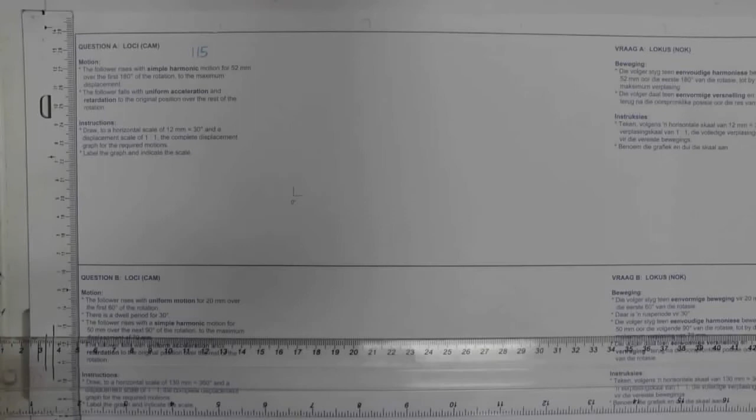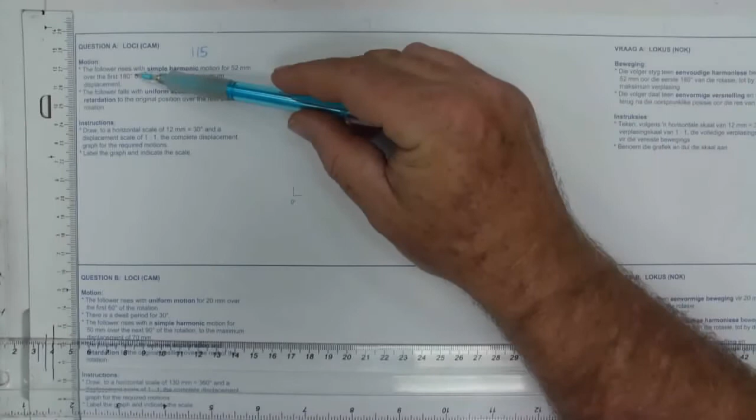Hello grade 11s. Today I'm looking at page 115 from my workbook, where they're asking you to just draw the displacement graph. And what they're saying here: the follower rises with simple harmonic motion for 52 millimeters for the first 180 degrees. Then it falls with uniform acceleration and retardation for the rest of the rotation. So the scale here is 12 mm to 30 degrees, and the vertical scale is 1:1.

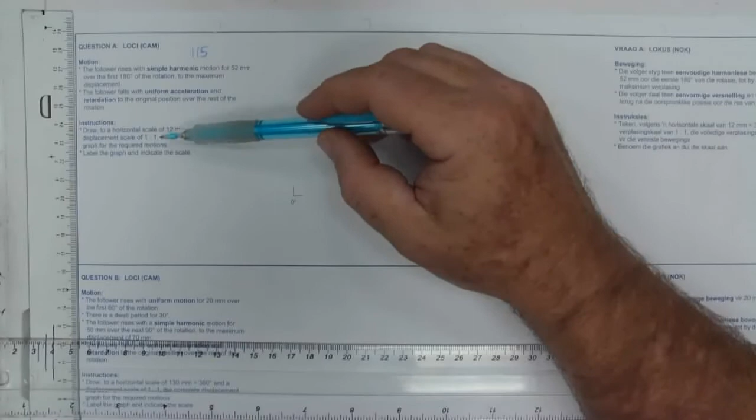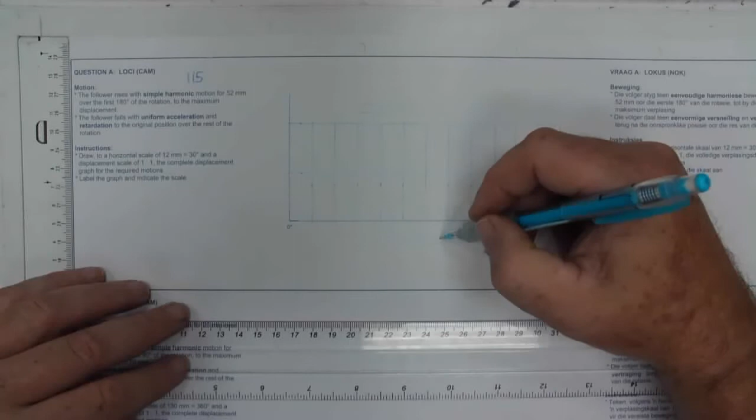Here I've done some of my constructions, so my maximum height of 52 and my 12 millimeter splits for 30 degrees. I'm going to label my graph, the displacement graph. I'm going to put in my horizontal scale and also put in the vertical scale. There is all the important information. Now to do the graph.

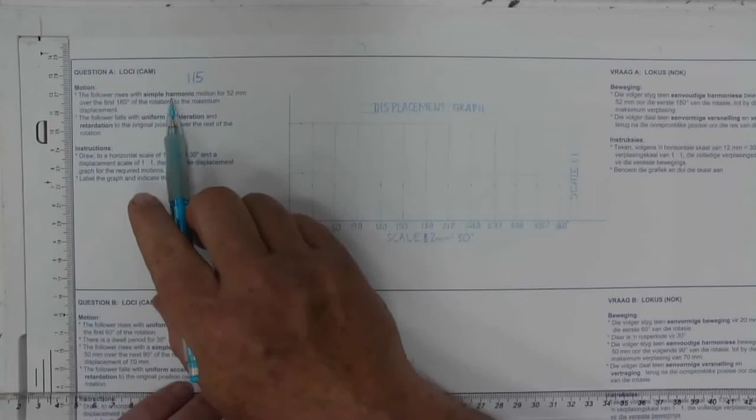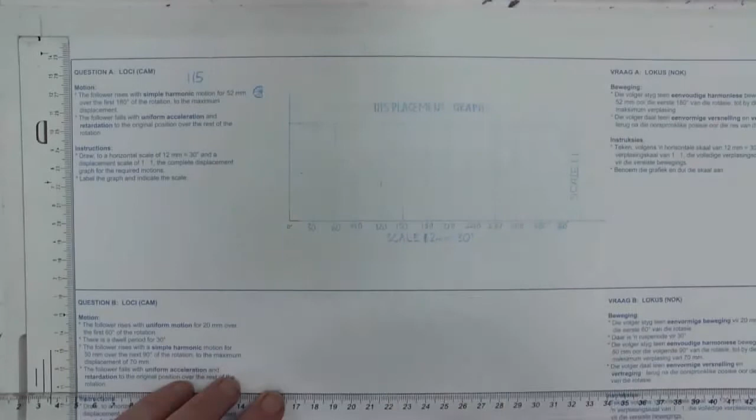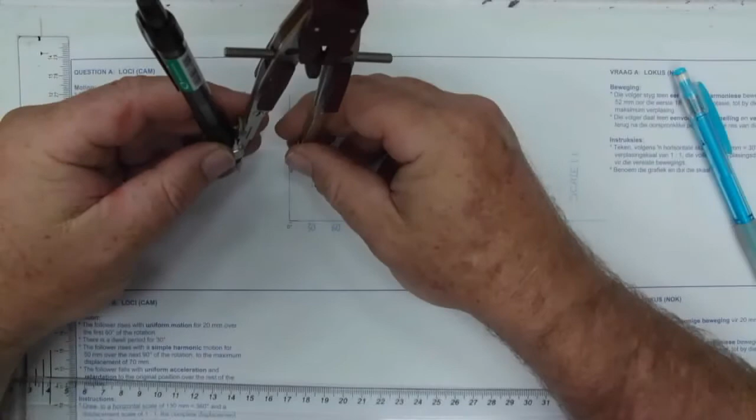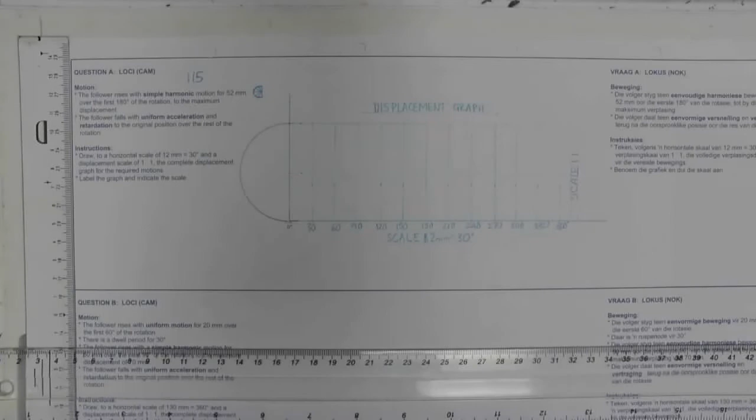It says for the first 180 degrees we use simple harmonic motion. Simple harmonic motion is where we divide the height by using a semicircle, and the 30-degree splits are pizza slices. So what I'm going to do is draw my semicircle. Then put in my 30-degree splits, my pizza slices.

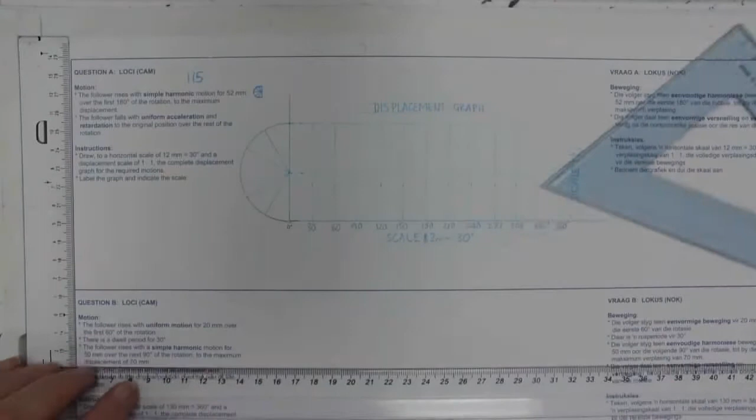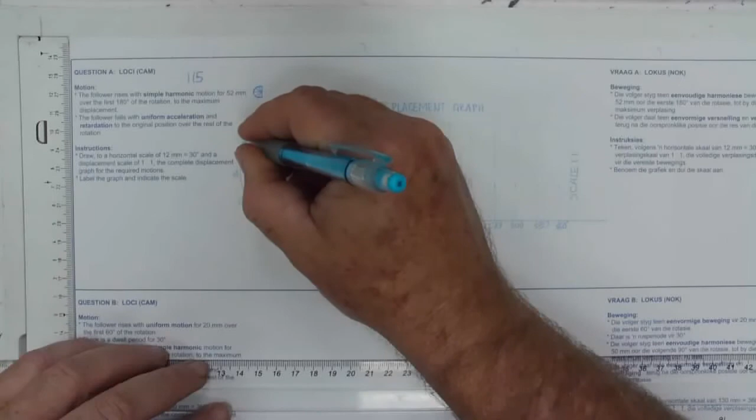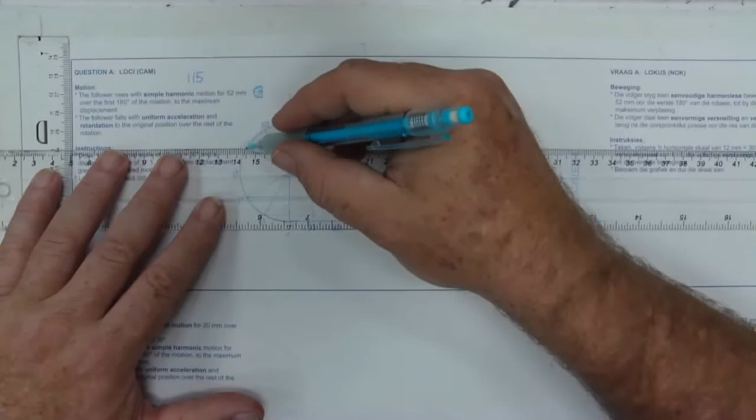Now if we start at 0, we could label it almost the same. So there would be 0, 30, 60, 90, 120, 150, and 180. So we now take where our 30-degree slice is to match up with the 30. Here's 60, we match that up with our 60. Here's 90, we've got already. 120. 150

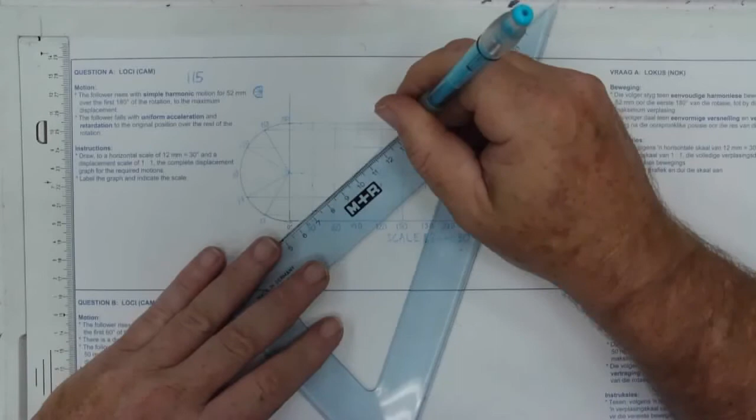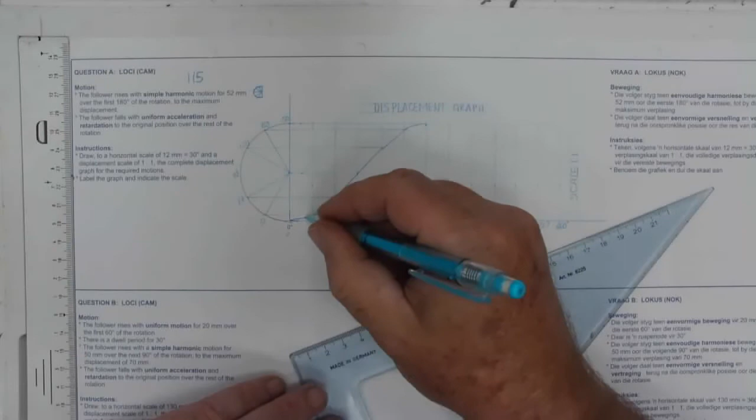and 180. Now this is a little bit like a helix, so our middle 3 would be on a straight line, then a slight bend, and then it curves into the last corner. Same on the other side. Slight bend, and then get it to curve into the final corner. So those went very good. There is my simple harmonic motion using the height division on a semicircle.

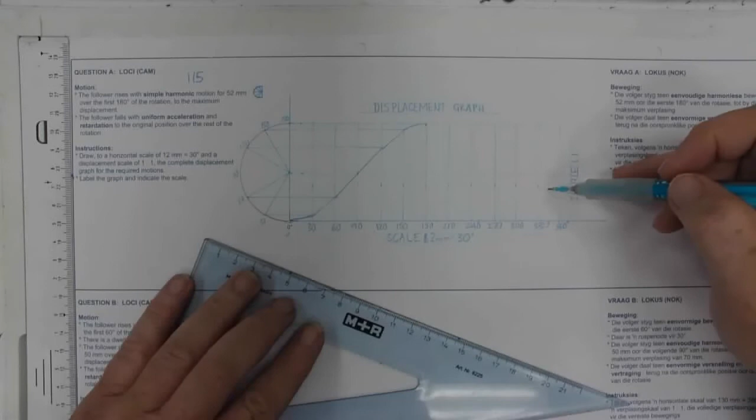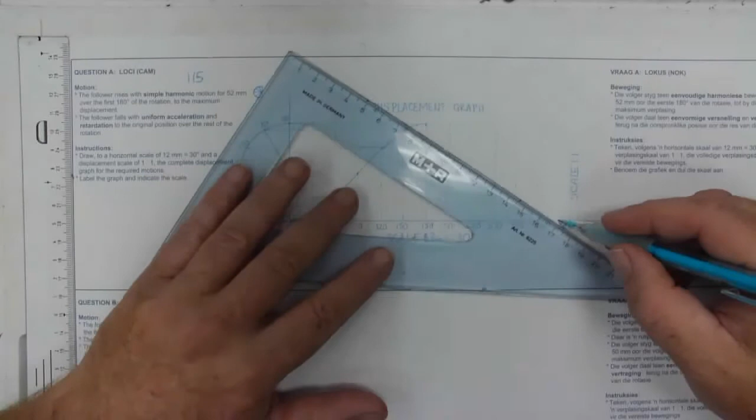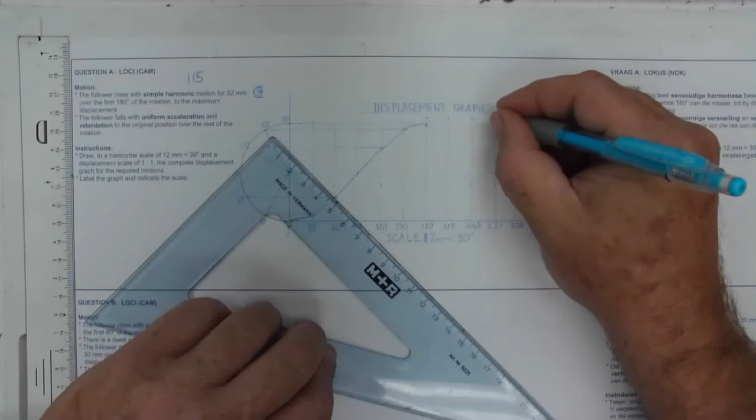The next aspect is where it's going to fall with uniform acceleration and retardation. Now it's a little bit similar. What we just need to do is we need to find our center of the space. Now the easy way of doing that is if we project a line from the top corner to the bottom corner, that finds us our start point and our end point, and in the middle there is our middle of this shape. And it should give you 6 measurements.

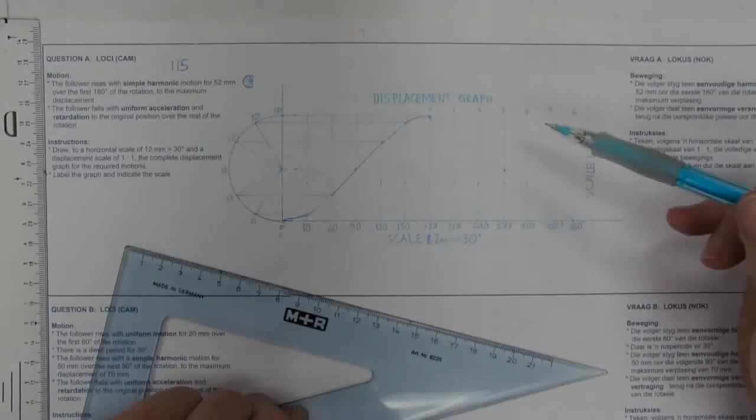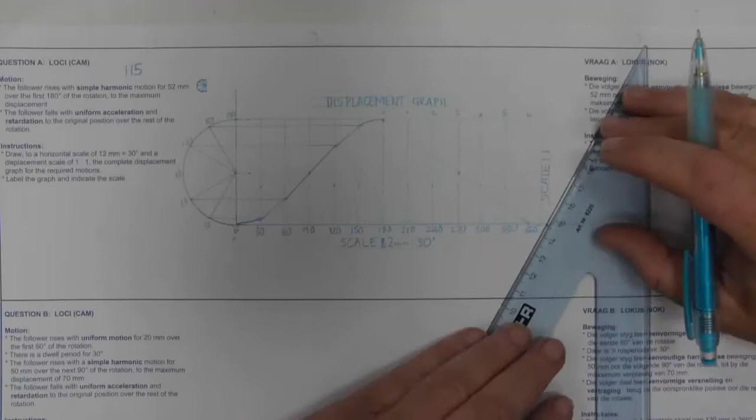Now what we need to do is we need to mark off the heights in equal measurements now. In simple harmonic motion, the heights are marked off on our pizza slices. In uniform acceleration and retardation, the height measurements must be equal. Now what I know about the height, because it's 52, that's not divisible by 6, so we can't get 6 equal heights. So we need to do the line division construction. So if we remember, the line division construction means we take any angle and we mark off 6 equal measurements.

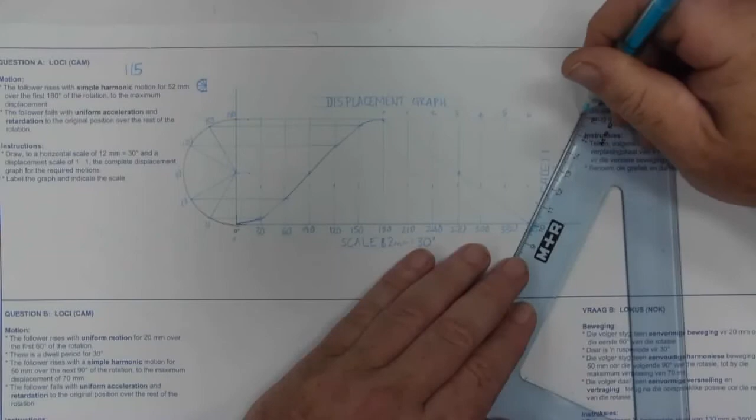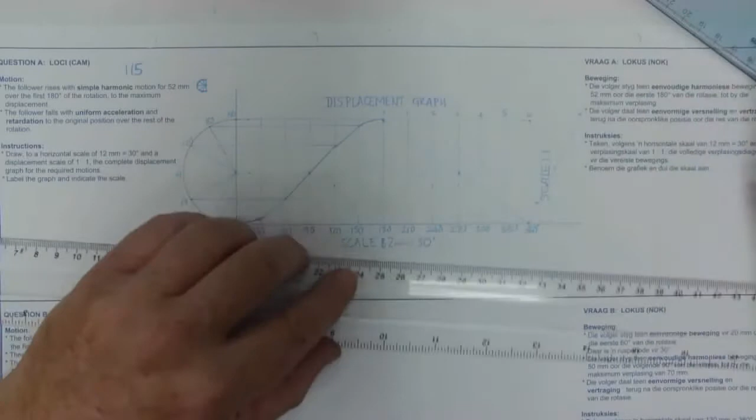So there is my distance. There's 1, 2, 3, 4, 5, and 6. And what we're going to do from that is now we join up the last point to our last height. And we should be using 2 set squares. So there's my last height. And we line this up now. Now we slide our set square down and we project the next heights parallel.

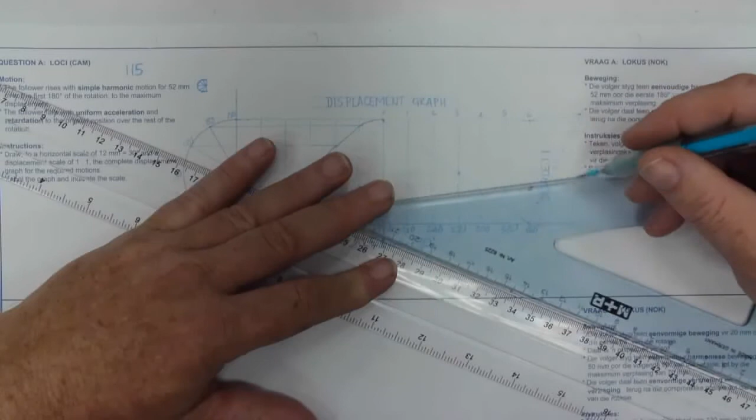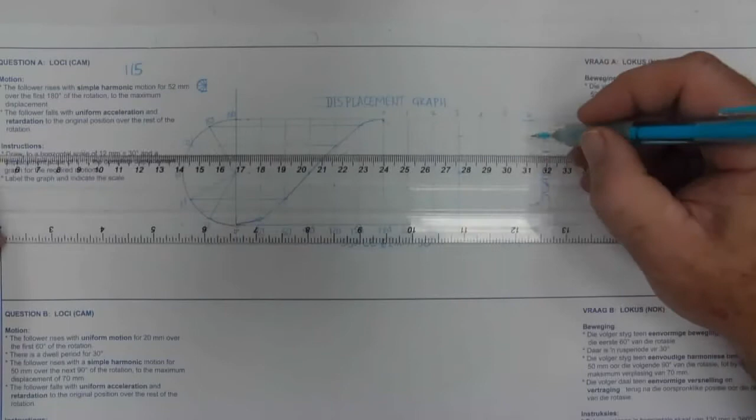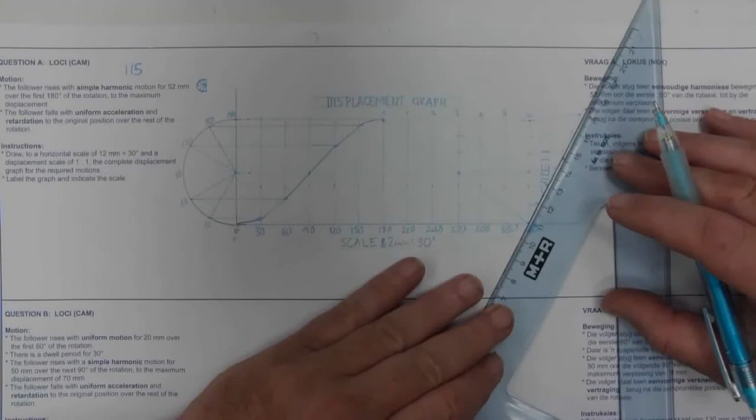And there are all our heights. Now this should line up with that point. Looking like we're a little bit out. Now we're going to transfer these height measurements across to our center line. I don't know, this one looks out a bit there. And then we can label these as well. So that could be 0, 1, 2, 3, 4, 5, and 6.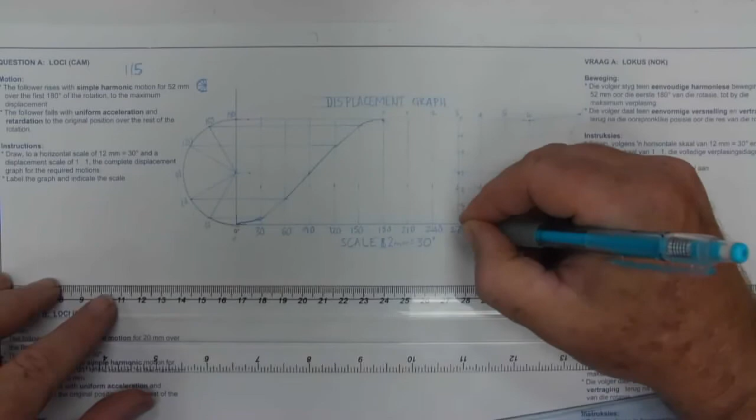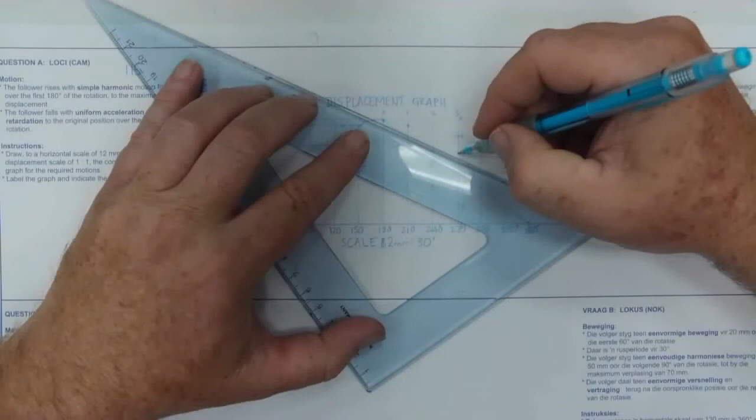Now we draw the first 3 lines from 0 to 1, 2, and 3. Where the first line intersects, so that's 1 and there's 1, that gives us our point. Again, we go from 0, project to point height level 2. Where it intersects 2 and 2, that gives us our next point. 3 we've got already because it's this diagonal we've drawn. And we've got to work back on the other side now.

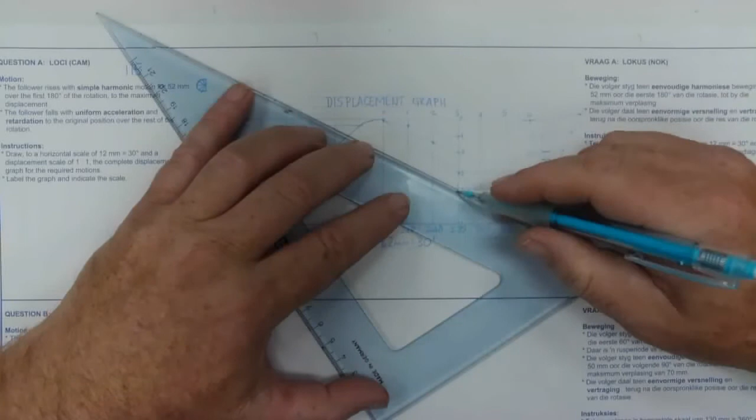So for the last 3, we go from the opposite corner, we draw the line from the opposite corner, so that was height level 4, it's going to match up with vertical line 4, it gives us this point. Here's point 5. And that matches vertical height 5. Much the same, this should give you a very similar shape. The middle 3 should be lining up.

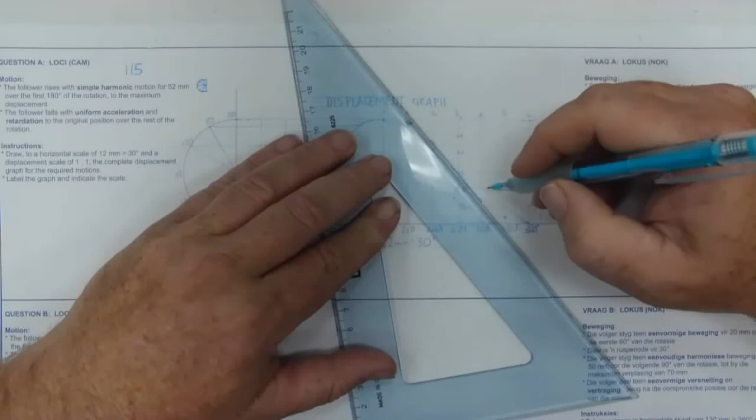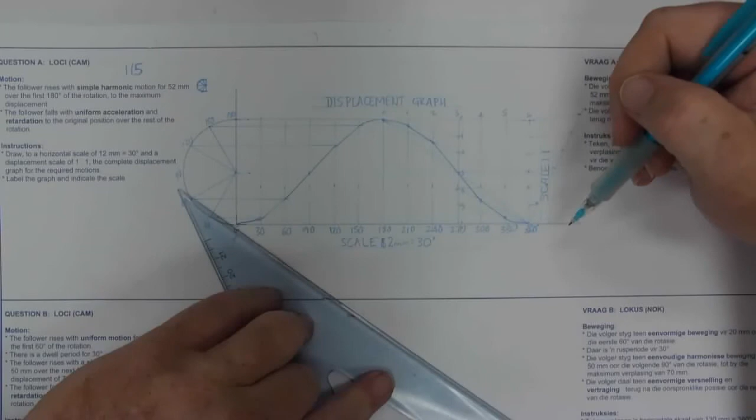Then the slight bend for the last one, and a curve to join up the last point. Slight bend and a curve. And there we have our uniform acceleration and retardation coming to the end of the graph. And that is the end of question A on my page 115.

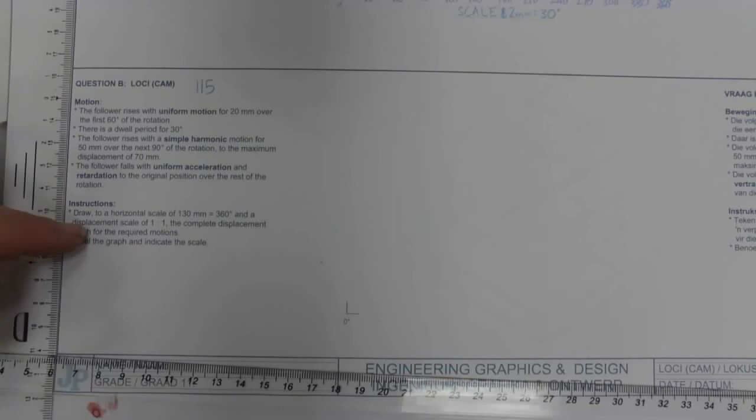Hello grade 11s. I'm looking at page 115, the second question, and they're asking you to draw a displacement graph with the following information. So I'm going to start by constructing and labeling my displacement graph.